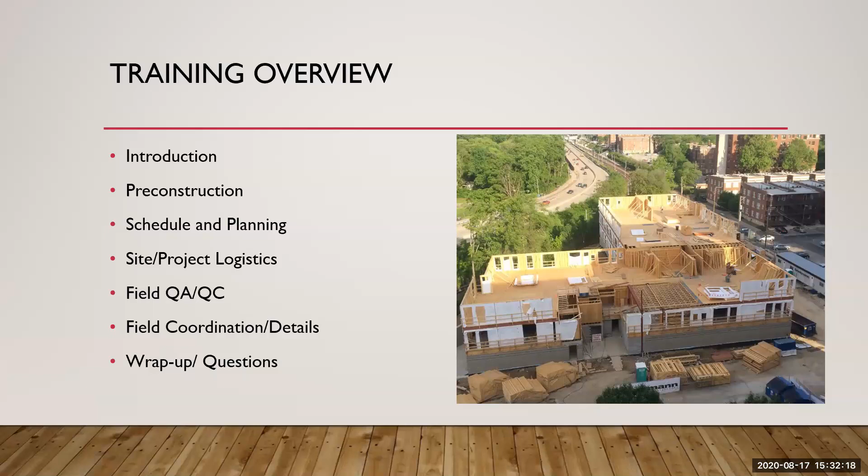So the goal of today's presentation is hopefully when we leave today, you guys have a little bit of a better understanding of what it's like to be on a stick-built or panelized wood project if you've never been on one. Hopefully if you have been, you're able to contribute a little bit, or you learn something a little bit different, a little bit new. The way we're going to structure our presentation, Leanne's going to focus more on the stick-built side, and I'm going to focus more on giving you information from a panelized perspective. So we'll kind of be ping-ponging back and forth between each other, trying to help tie it all together.

And then obviously, open format, you guys have been to the trainings before. Make sure if you've got any questions to ask them. If Leanne or I aren't able to answer the question, I'm sure there's somebody in the room that's going to be able to provide a little bit of insight. And then, we're here to answer your questions. So if you have anything that you want to know or bounce off, let us know, and we can do some more research after the training.

So let's jump into the pre-construction items here. So I sat down with Matt Funk for a little bit this morning and picked his brain a little bit about it. So as you guys know, and this probably goes for every single project you're ever on, a lot of decisions that get made during the pre-construction phase dictate how your field operations are going to go throughout the duration of the project. So when you're talking about wood projects, for example, the decision to go stick-built or panelized is going to completely take you down 2 separate paths that have 2 separate game plans, 2 separate schedules, 2 separate everything.

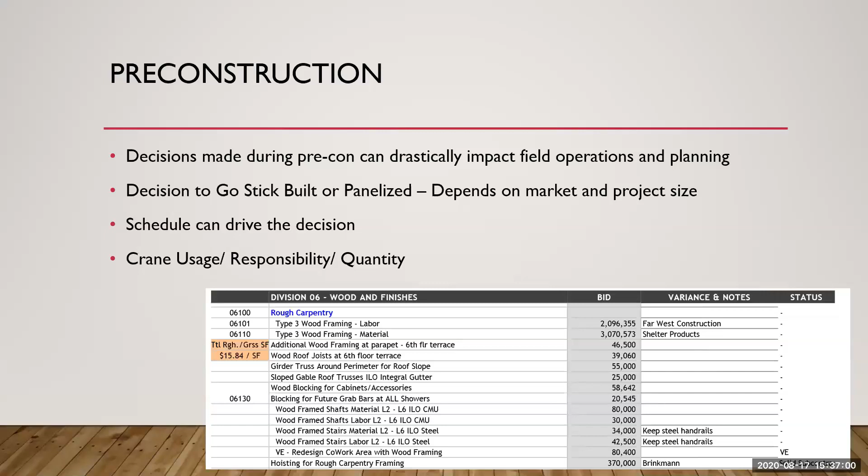Yeah, for sure. So just to go over this, we already touched on that last week, but the submittals basically will look pretty similar for stick-built and panelized projects, but the one thing they most differ on, which we just talked about, is the shop drawing phase of all the panelized shop drawings. When you go through all those panelized shop drawings, you really understand the drawings well, and you see where your MEPs will overlap into everything.

So one thing that I tried to do on our project specifically was on our layout drawings, trying to put where all our mechanical ducts were going to go through all the trusses and everything, which we'll look at a little bit later. But that was probably the biggest thing from the panelized shop drawings that's a little bit different from stick-built.

And then another big thing that we need to look at is always your weather barrier information, to make sure that you have a ZIP or Tyvek rep involved in the whole process. So you want to make sure that they come out and do a few site visits. They're meeting with everyone on site, your superintendent, your engineer. Specifically, they need to meet with your framer, make sure they understand the requirements.

And it's not that they're going to be going through the architect, but they need to make sure that they apply to the requirements through the ZIP system or Tyvek. And then other things to just check for when you're in the pre-construction phase before anything has really been put into place: it sounds silly, but make sure that all your door swings don't conflict with any FF&E or casework.

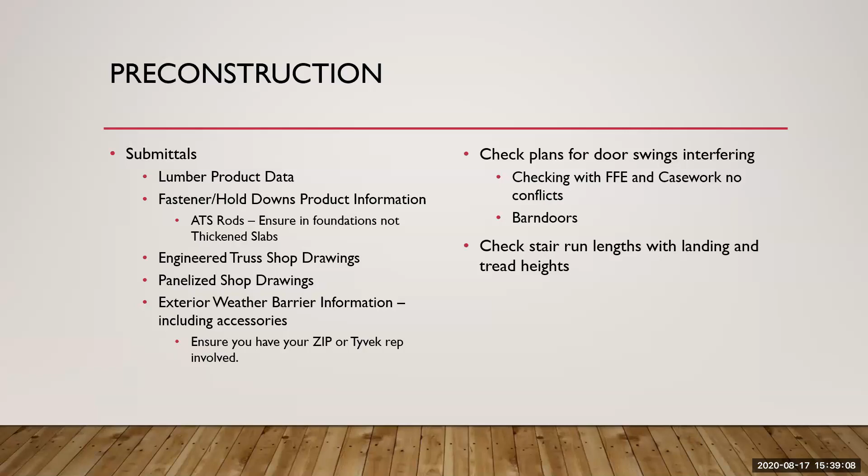Hey, Garrett, before we dive into the scheduling stuff, from us doing panelization, in my mind, if your drawings are incomplete or just not great, with panelization you're pretty much hiring an expert detailer to check the structural engineer, and you can flush out a lot of the RFIs and potential conflicts before it snowballs into a field delay or an issue in the field.

On our project, for instance, we're light years ahead of where we would have been if we were trying to stick frame this and the RFIs were coming up as the header didn't work as we came across it. So that's something to take into account: if you have concerns with how complete your drawings are, a panelizer would be a good option, because that's somebody that will really flush out all the drawings and make sure it works.

And to that point, when you're panelizing, our panelizer designer is a subcontractor just like any other sub. You can find good ones and you can have bad ones. We had a really thorough good one. So keep that in mind, because if you have a less than great designer who's just taking what's in the drawings and making panel shops out of it rather than thinking it through and coordinating with everything, that could cause you more headaches down the road. So that's a really good point, because not only do you have another subcontractor, but they could also be good and bad.

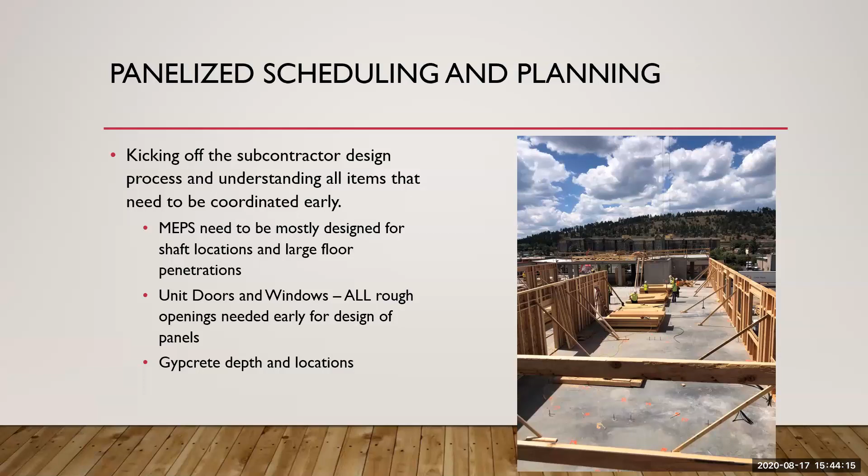So keeping the ball rolling on the scheduling and planning side of things, this is a little bit of a case study. I've got a lot of examples from Uncommon down in Flagstaff, to give you guys an idea about how fast panelization can go. And it sounds like stick built can keep up in some instances, but this is a picture of this project on May 24th of this year. We had just stood the first panels on our 3rd floor of our first phase.

Roughly 3 weeks later, about 3 weeks to the day, 15 working days, we were setting our first wall panels on the 4th floor above. So we were able to knock out exterior wall panels, interior wall panels, the floor trusses for the floor above, floor sheathing, all the associated inspections with that, and then get the panels started in about 15 working days. They were working weekends, but if you look at a work time frame, they're cranking out a floor of about 20,000 square feet in about 15 working days.

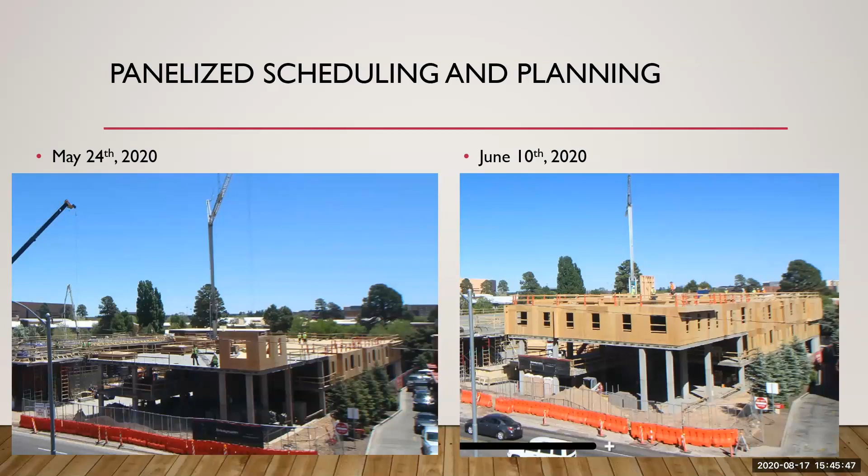Sure. Well, to zero in on it even further than looking at the big numbers, understanding those rates is key. You've got to know that so you can schedule. Bobby, Steve, Leanne, and I sat down before this and talked through some numbers. In our contract at Purdue we had 8,000 as our baseline for our carpenter. But Bobby was saying, hey, we're getting more than that stick built, honestly better than 8,000 square feet.

So big picture, thumb in the air kind of thing, if you're doing some pre-con work or trying to estimate this stuff, planning on somewhere between 8,000 and 12,000 square feet per week spits out a pretty accurate number of what you should be targeting as far as production is concerned. But that square footage includes the walls, floor joists, and the sheathing for the floor above. So that's a whole floor.

And then manpower from that, you're looking at crew sizes of anywhere between 8 to 10 guys either stick building walls or lifting your panels, and then another 8 to 10 guys following your wall crews with the crane, setting your floor joists for the floor above, and then nailing down your sheathing.

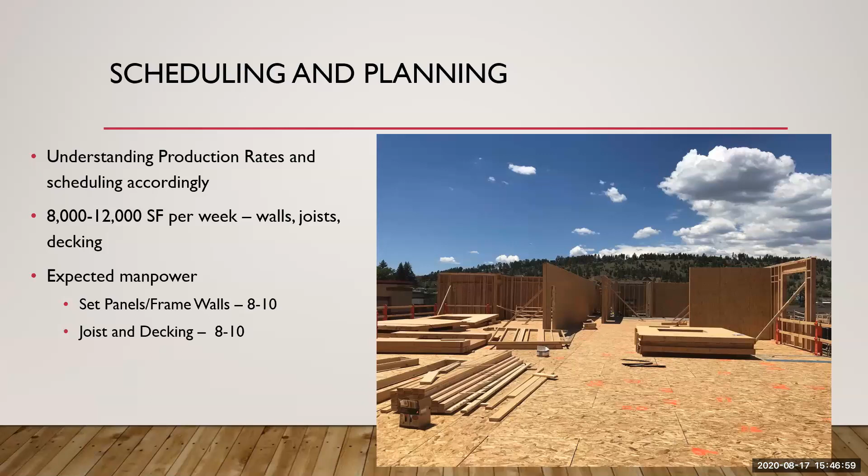So scheduling and pre-planning. When you're looking at sequencing and constructability, make sure you're doing multiple cover inspections per floor so that you can speed up the process. We split ours into the north and south Element portion, then north and south of the commons, and then north and south of the Aloft, so that on each floor we could go on to the next phase.

And when you're creating your phasing plan, don't get stuck just in the framing aspect, but look beyond that. Okay, what has the most finishes? What's going to take the longest? So we started on our Element side because they have the extended stay units, so those units were going to take longer. We needed to start on the Element, work our way through the commons and out into the Aloft side.

And then pre-rocking, making sure you're getting all your pre-rocking in before. Some of the common places are your ceilings and corridors, top of your interior partitions, mechanical electrical rooms, your baths and showers. And one that's important is the stairwells, making sure that you buy it out with your framer so that whenever they're framing those landings, they put their pre-rock in there so that you're not slowed down.

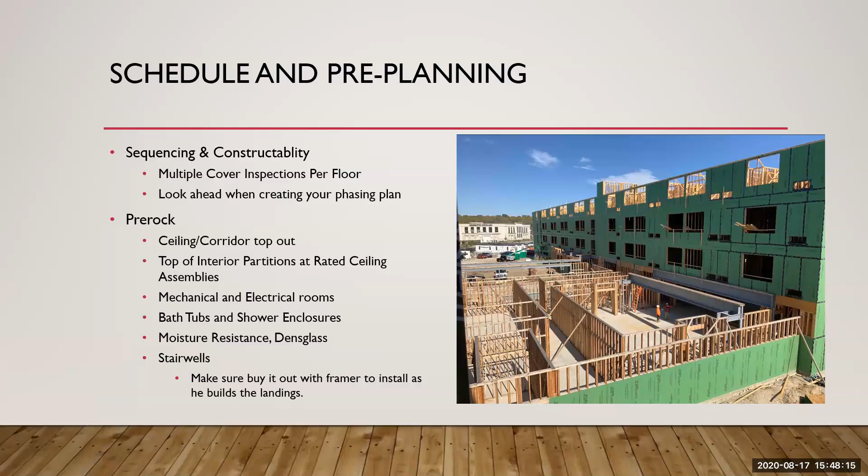So this topic right here, we wanted to almost have a little bit of a group discussion on. I think the settling of wood is always different; you get mixed answers from everyone. At Uncommon, we had a unique situation where our vinyl window installer didn't want to begin installing windows until after the roof sheathing and basically all the structure had been completed. We wanted to get them started as soon as wall openings were available. So what have you guys come across?

Because for us, we were pushing that, but we're still trying to figure out the risks of installing our vinyl windows ahead of the roof being in place. Has anybody else in the room come across a situation with the sequencing of your windows or other items like drywall, with the fear of drywall cracks and things like that? Any stories to tell?

We had a situation in Denver, a two-story all wood structure with wood roof trusses, and the consensus was you don't want to put in any windows or drywall until you have your roof trusses on. Really? So did you hold off? No windows and no drywall until you had the roof? We put in what we could. We tried to rip some drywall because that was a gypcrete project too, and that's kind of the precursor for the gypcrete.

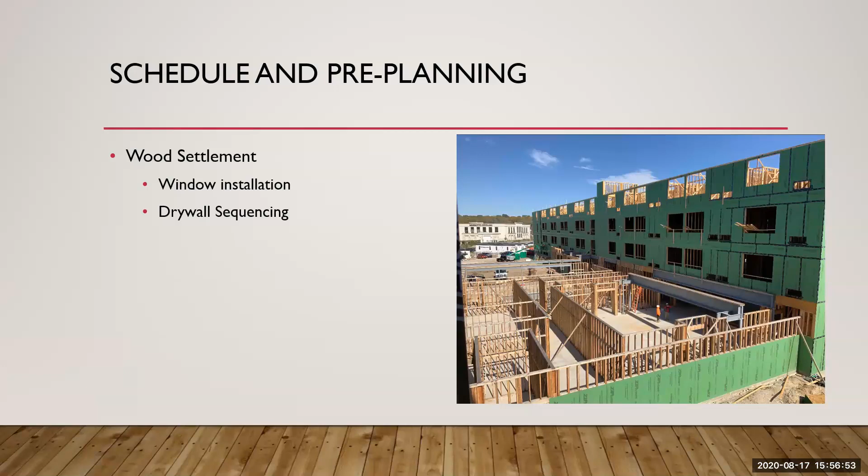So having those details worked out, have those specific pointed conversations in your pre-con meetings with your subcontractors, with your drywall guy, with your window guy, with your framing guy. Make sure you have those things and then put them together and figure out how you want to do it as a team. Like Kendrick said, get your directors involved in that conversation. If there's a little bit of risk involved, they'll have to have some meetings and make a decision. So appreciate the input.

All right, so out of scheduling, once you move out of it, one thing you really need as you're working on your scheduling is having a phasing plan. A phasing plan should not be a foreign type of thing to anyone in this room. Most projects, you've got some sort of phasing plan, and all you're really doing is breaking a project into different areas where you're focusing different work or pushing work ahead sooner than others and breaking it up.

So this is the footprint of the Uncommon project, and schedule drove us to do a phasing plan. And why we did the phasing in this manner is we're building the project in towers. So we're building this project up to the roof level, getting a roof on it so that we can start our drywall in this phase rather than building all of level 2.

Oh, do that every time.

Building all of level 2 and having to wait to build all the way up before you can start any drywall. This allows you to start other trades quicker, and this allows you to really get things going. So hopefully by the time you're into the job, you've got places that are sitting empty, punch listed, ready to go, and you're not having to worry about finishing the whole job at one time.

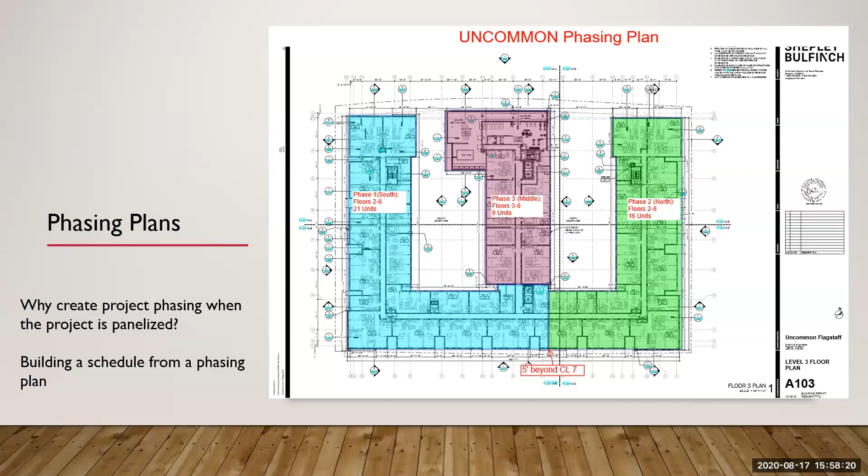But it's obviously critical to have this phasing plan at the start of the project so that you can schedule it, because having a phasing plan changes your schedule completely. So knowing what you want to schedule and knowing square footages and things is pretty important to have. So you've got to have full subcontractor buy-in into that.

So having this early, you've got to make sure that when you're having those buyout meetings, your subcontractors are aware that they need to be breaking up their crews for this, prepping to have potentially 2 crews working at one time in different phases. So everybody's got to know. And this kind of ties into what Kendrick was saying, you've got to manage your design team, the shop drawing review, and the procurement process.

So if you're going to phase a job, you have got to make sure that not only do your subcontractors plan to break up their shop drawing processes so that you've got them in phases, but you've got to have your architect and structural engineer all prepped and ready to be reviewing them in broken up phases like that.

And then once you get those approvals, you've got to make sure that your subcontractors then follow through with that and they procure those materials in that order with their suppliers. So if you have one of those chains break in that line, you could derail a whole project if phase 3 starts getting made before phase 1 or something like that, and lead times can get all jumbled up. So having those ducks in a row early on is very important, having everybody bought into that.

And obviously, you've got a guy drawing up your panels early on. Answering RFIs and getting the design team involved in questions is so much more important at that phase because the answers are time sensitive, even more so than on a typical job where you can stand to wait. But if you've got a whole phase of panels waiting on design coordination, not answering an RFI promptly from your design team or from internally could really cause major problems with getting your panels in the order that you need them.

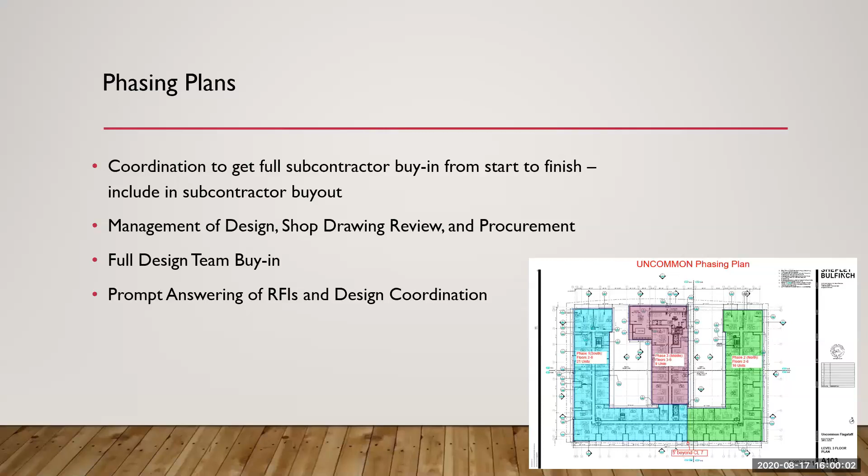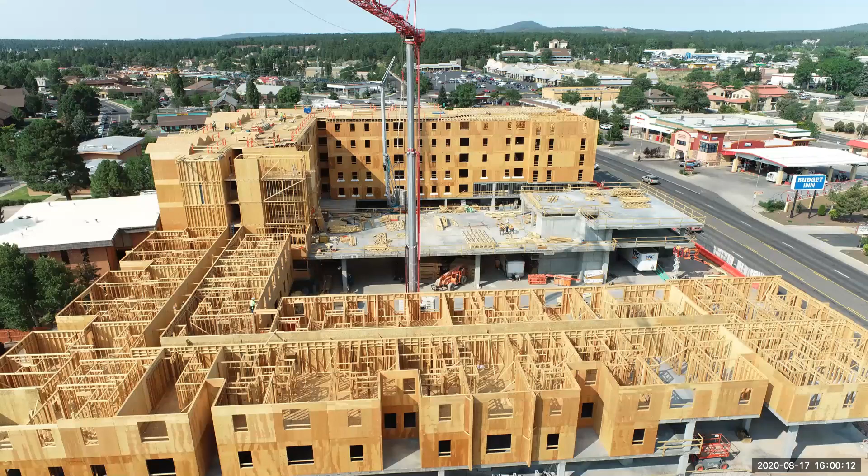So I wanted to show a picture. This is from a few weeks ago, at Uncommon, and I wanted to show you, putting a phasing plan together and having it midway through execution, this is what it looks like. So this was at phase one. We've got our 5 stories of wood built up with our roof sheathing on and with our roof eaves. We've got roofing going on as we speak right now. But this shows you that first phase.

Our second phase is down here. This is the 3rd and 4th floors right there. So you can kind of see that phasing at work. We're pretty much topped out with our wood framing in our phase 1. We're midway through our phase 2, and we haven't even started our wood paneling on our phase 3 yet. So look at it, put your hard hat on and think about it.

We've got MEPs roughed in through level 5 over here. We've got our pre-rock in. We're prepping. We've got our gypcrete under our shower bases and our dead spaces already in place. We're teeing up and getting ready to do our drywall in that phase of the building. We're still just getting ready for the MEPs to start over here. So we've got that staggered flow going. On big projects like this with tight schedules, that's the type of thing you've got to have working for you to make sure you can fit all those things in and get it done by the time your due date comes.

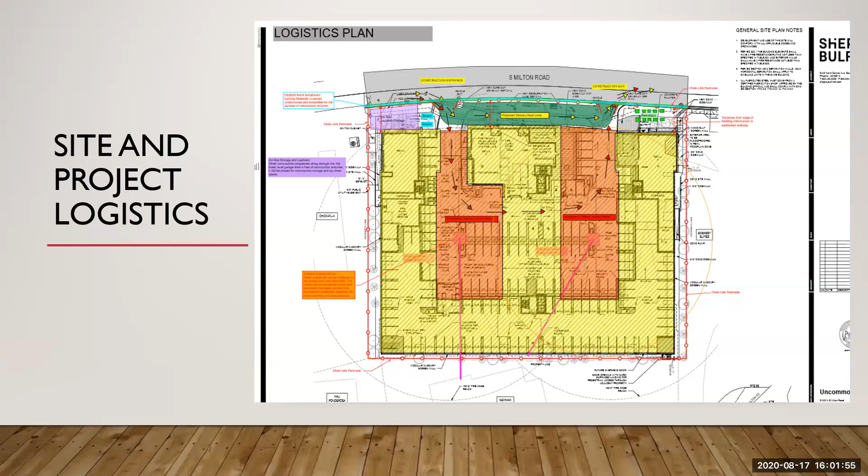So for your site and project logistics, you need a large laydown area for all your lumber and trusses to be on site. It needs to be out of the mud. For our project specifically, we didn't need one off site. It's kind of cool whenever you contrast the 2 different projects because we had a huge site, whereas they did not. So they actually had to have a separate place for their laydown area. We just needed to put down some rock and we could get everything there. It was a very nice luxury to have.

And then just reviewing the lifting plan and where the crane's going to be, and make sure that area stays clear. So make sure you don't have any guys put their job trailers there or something ridiculous like that. And then something that we specifically had to have was a construction road for emergency access, to be able to go around our entire project before we could start going vertical.

And then as well, depending on your jurisdiction, I'm not sure if that's a requirement for everyone, but all of our fire hydrants had to be live before we went vertical as well, since it was a wood framed building. Yeah, that fire thing applied to us too. If you're in wood construction, you're building with combustible materials. So that puts you in a different category than if you're doing metal framing and concrete. So like Leanne mentioned, having a live fire hydrant was a requirement of her job.

For us down in Arizona, we needed to have a live fire hydrant. We also needed to be taking up a standpipe that could be made live by the fire department if they needed to take a hose to areas. So whatever floor we had framing going on, we had to have a riser up to that floor.

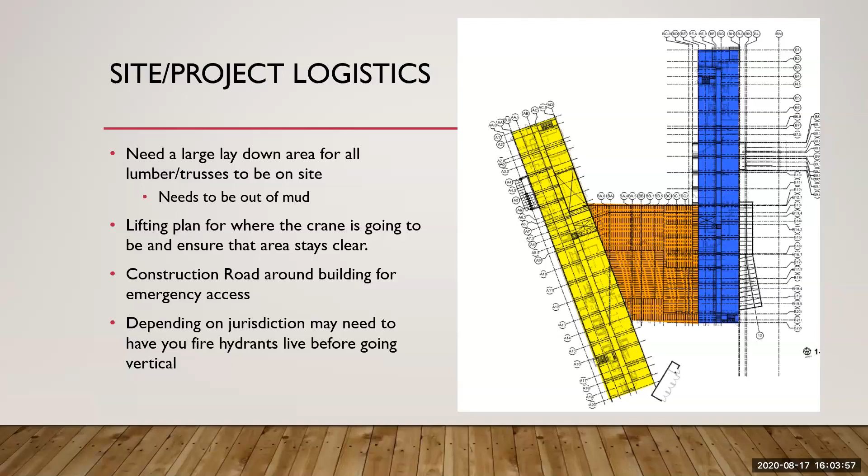At Uncommon, we've got two different cranes. Our footprint is much larger than, say, what Purdue was. So the big difference was, in order to be able to service both areas, you can see the swing radius of those. This crane can service three quarters of the site, and that crane can service three quarters of the site. So knowing the logistics, the size of the cranes, and your budget is really going to drive how you end up laying those tower cranes out.

So your project has tower cranes on it. You get them bought, you bring them, or you get the subcontract bought out. What's involved with that? Is your site team getting ready to set up and plan for that? What do you got to think about?

As simple or as silly as it may sound, it's really important to make sure you coordinate the elevations of those things. You don't want to cross streams, you know what I'm saying? So you don't ever want to have a situation where your tower cranes will conflict with each other. Obviously, this tower crane could drop a cable and conflict with that one, but with the heights at which we coordinated it at Uncommon, they don't have the risk of swinging into each other or hitting each other from a mast or boom standpoint.

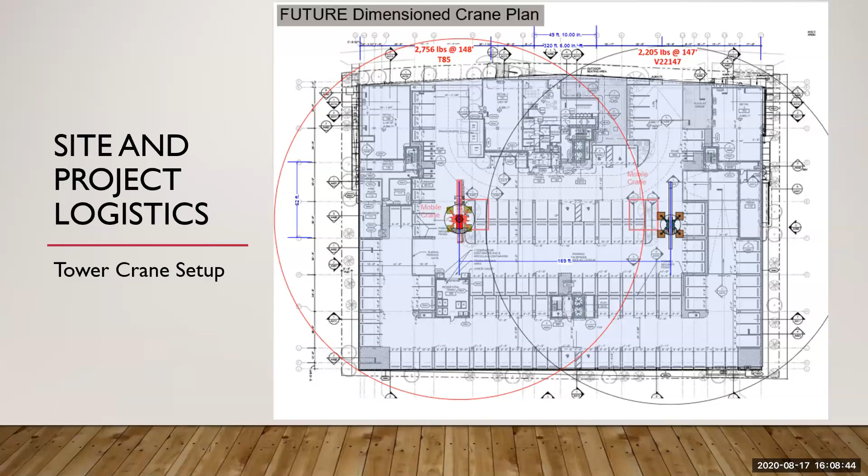Okay. Talked about the tower crane. Let's touch on one of the most important things when you talk about site logistics or field operations, safety. We've got some examples here. So any stick build project that you've got some height to, you've always got leading edges and things like that. And making sure you take these things into account when you're building panels is really important. Leading edge protection. This is the system that our carpenters are using at Uncommon to basically give us some protection when you're up there inspecting and putting that sheeting on.

You can see they put these in just far enough so that when the wall panels for the next phase come on, they have just enough room to set those exterior wall panels outside that barrier, and they can knock all those in place and then brace them, and then they can pull these barriers. So there's basically an unbroken edge protection as they build these upper floors, which is a pretty slick deal.

Another really important thing with safety is controlled access zones. Obviously, if we're using a tower crane like this to swing panels and set, this is our 3rd floor. They're taking panels up to the 4th floor to stand them up. You can't have anybody working in that floor beneath. If a load comes loose or something like that, you don't want to have people working in that area where those panels will punch right through the sheathing or the decking and potentially hurt or kill someone.

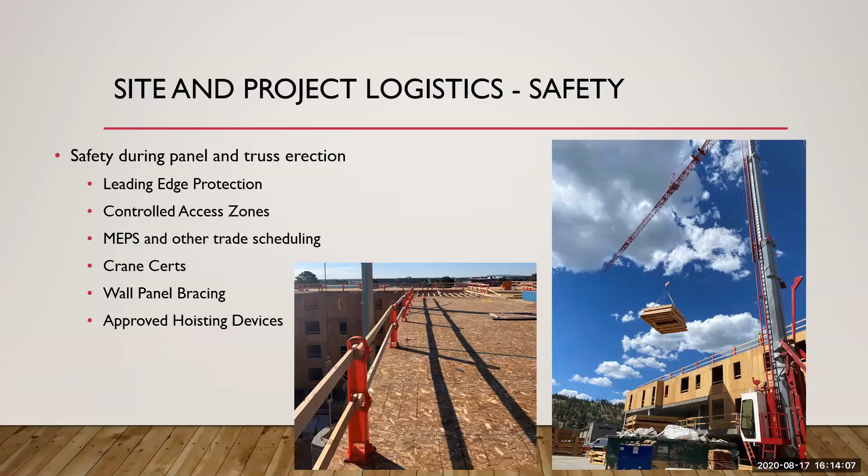Sorry, I feel like I'm talking endlessly. Shocker.

If you've got those tower cranes on site, some things you need to be thinking about: how are you going to power those things? Tower cranes require power. They don't have their own internal engines. So you either have to have temporary power from the utility set up, your permanent building power set up and ready to accept those, or have it powered by some sort of generator. So think about those things, because it might slip your mind, but that could end up being a very, very large cost to your job if it gets overlooked. How am I going to power this thing?

Also with the tower crane, you may have all kinds of space or not a lot, but if the area you plan on staging all your panels or your bunks of wood, anything like that, is outside the sweep of that crane, it could be a problem. And then I've already gone through the air rights and airspace permissions. Agreed.

Okay. So the next important thing with site logistics and planning is if you've got a tight job site, think about having a laydown yard, a place separate from your actual job site where you can bring all your big deliveries. You don't have to worry about traffic control or traffic restrictions. In some places, there's more than enough room. Leanne and the project in Kansas City had the luxury of acres and acres of free open space. At Flagstaff, we didn't have 500 square feet to spare.

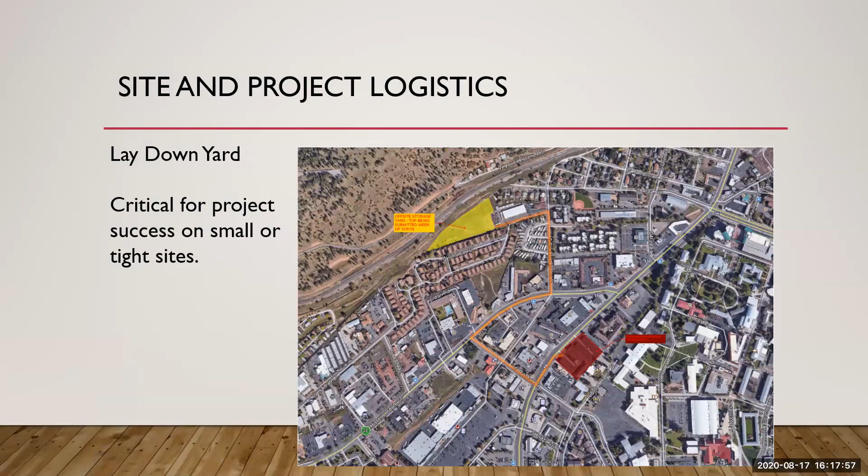I guess part of that to acknowledge is they're two separate contracts, the furnish and the install. Most instances I've been involved with, it's all a lump sum package. So the framer has the panels also, so we haven't had to worry about taking that extra step to make sure that material was available. Kind of the same with the crane as well. I don't know if we're renting this one or not, but there comes more risk with not renting and more coordination with insurance. You'll probably tell us about the operators and how much that costs too. Yeah. It's probably more imperative if you have those two contracts.

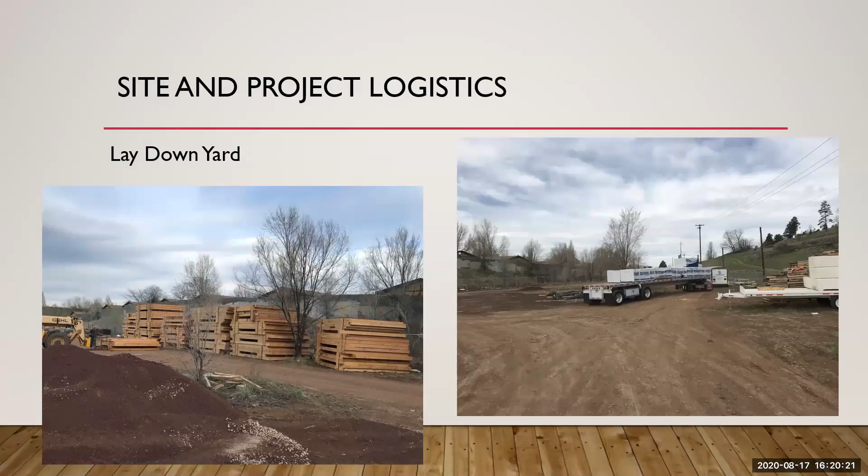So just to kind of piggyback on those things, not only is it good for just the logistics side of things, but that laydown area allows us to have a place to receive those shipments. And our subcontractor actually has guys at that laydown yard unloading, and they're shaking them out, figuring out where everything goes and taking quick measurements and making sure the panels are right.

We found issues in the laydown yard before the panels have gone up that has allowed us to try and get ahead of problems that, if those panels would show up at the job site and you would have gone to put it in place, you would have been like, oh crap. We've been able to get ahead of some field QC items by having them checking these panels when they get them rather than bringing them to the site.

But it helps keep the job from being cluttered. Even if you have a tight job or even a job site with some space, having that laydown yard away from the job site helps keep that operation separate, and all your other trades are able to move around much more freely than if you had hundreds of wall panels stacked up on your site. Did you fill up more storage material too?

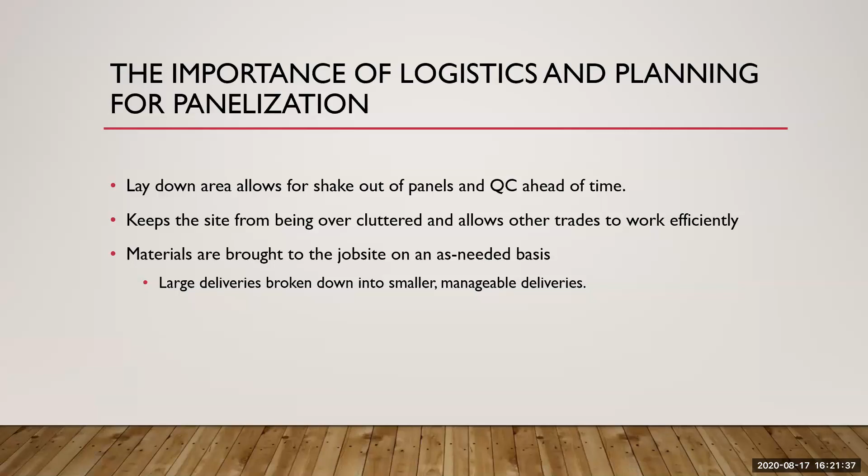And we kind of already hit on it, but the materials are brought to the job site on an as-needed basis in much smaller, more manageable deliveries rather than having a giant semi come with who knows what on it. So.

All right. Oh, yeah. So we threw this in there right before the meeting. We thought it'd be a good thing to touch on, but field operations kind of goes hand in hand with having your pre-con meeting, having that sit-down meeting with your framing contractor, making sure weeks, if not a month or so in advance, you've got all the details talked through, ironed out, and agreed upon.

So having your job-specific agenda, like pulling down that Bridgman template and going through it yourself one time and making sure that you've got questions and things that are going to be applied to your job and be useful. It's really important to do that. Very, very important. You'll get some questions out of it.

So isn't that one you guys flipped into Procore as a standard template based on this one? I know you guys came up with some pretty good templates on that job in general, but framing is one of them at the time. Our QC was one that we had a really sweet template in Procore. We don't have that sub pre-con agenda in there per se.

Yeah, but the idea is you come up with whatever it is, 12 things for one project, right? Talking points, initiatives, QC initiatives, whatever you want to call it. Yeah. And that rolls into some type of template, so you have all that figured out on the side, on some of these larger complicated projects. So. Yeah, I've got a PDF on our last sheet with a Procore slide. I think I know what you're talking about. I've got a little example of that.

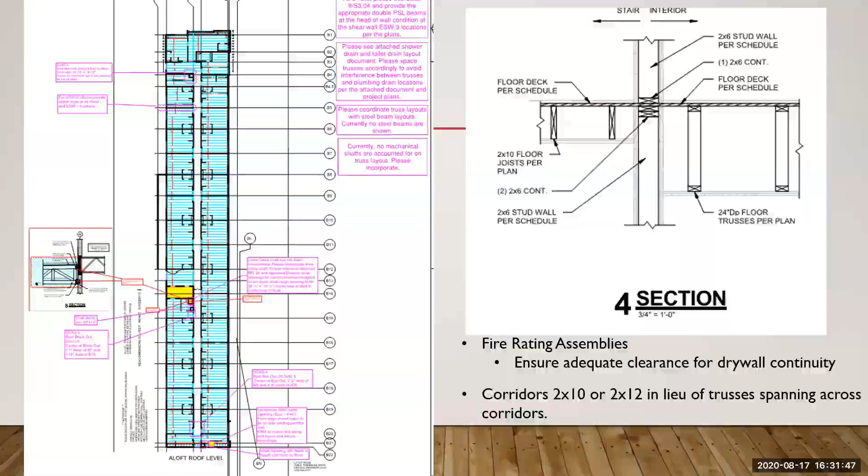We're not going to dive all the way into it, because I know she went over everything with the plumbing and making sure that we didn't have any conflicts. We did our overlays as well, but this was an additional document we provided to our truss manufacturers, going through each room layout and making a no truss zone, which ended up being really successful. We didn't have any plumbing penetrations hitting any trusses. So that was very good for us if anyone is looking for a way to avoid that.

This wasn't something I thought of until just now, but we had this problem at Uncommon. Our first few floors of floor trusses, the trusses were landing right where toilets were, right where showers were. We'd sent all of the MEP CAD files to our truss designer early on, and they'd asked for them specifically so they could coordinate the trusses around MEPs. So we took our foot off the gas on that one, thinking that they had it under control.

Well, it came down to time, and we had a lot of trusses because all the trusses are in place 2 floors before the MEPs start. Once they realized we were having these problems, the plumbers had to run up through the rest of the building and catch this and adjust it.

So we had to make a quick adjustment, like when we were 3 or 4 floors into the project, to get those truss guys aware of where our plumbing stuff was and to get those trusses out of the zone. So the planning that Leanne put in on Aloft was something that we had assumed that our subcontractors had, that didn't end up happening. So this is pretty useful information to kind of plan those plumbing locations out early on.

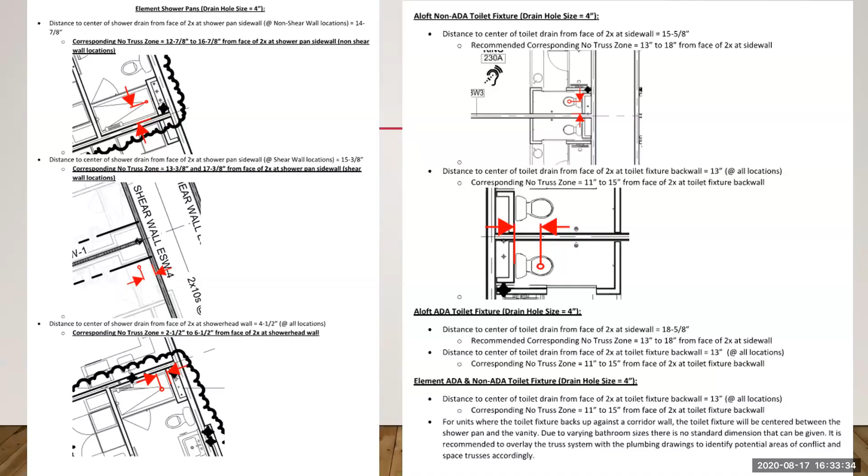And then this is another, just kind of reiterating the fact that knowing where all of your mechanical is, if it's going to be up in the duct space or if it's going to be below the lid, that's really important whenever you're looking at all your joists and everything, and making sure you're marking up. Get with your mechanical contractor. Okay, so the duct's this big, how much more space do you need? Is it going to be lined, or is the insulation going to be around it? Knowing exactly how much space each one needs is really important.

And then another thing that we kind of ran into as well is our roof hatches, making sure that you're coordinating. If you have the alternating tread ladders, the shaft sizes sometimes impede on that, and you won't have clearance for the firemen to get into the ladder and go up because of the rails and everything. So that was something that we ended up changing early on in the process so that we didn't have any issues later on. But yeah, just coordinating at the beginning and seeing how everything comes together is probably the most beneficial.

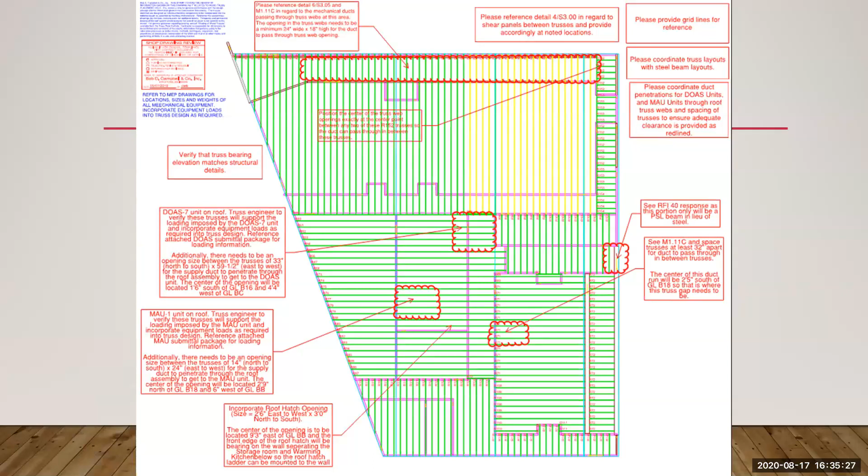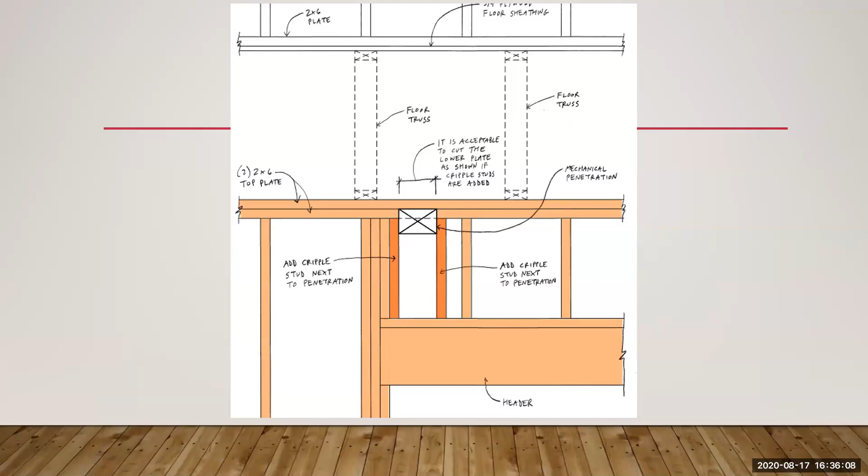So each one of these is different, and you've got to go through, and that's one big part of the QC process, going through and checking those things, because you miss a rod diameter. If your subcontractor goes and puts out a 7/8 inch rod instead of a 1-inch rod, your capacity in that rod just dropped from 13 to 17 down to 9 to 13. So you completely screwed up a structural design that you'd have to get a structural engineer involved in.

So those finer details are some of the things that are important to make sure you're checking out there in the field, because you miss it that first time and it's going to cause you some major headaches down the road where you're going to get the design team involved and potentially the owner. So keeping those things in mind when you're working with those TDSs and anchor bolts and things like that, it's pretty key.

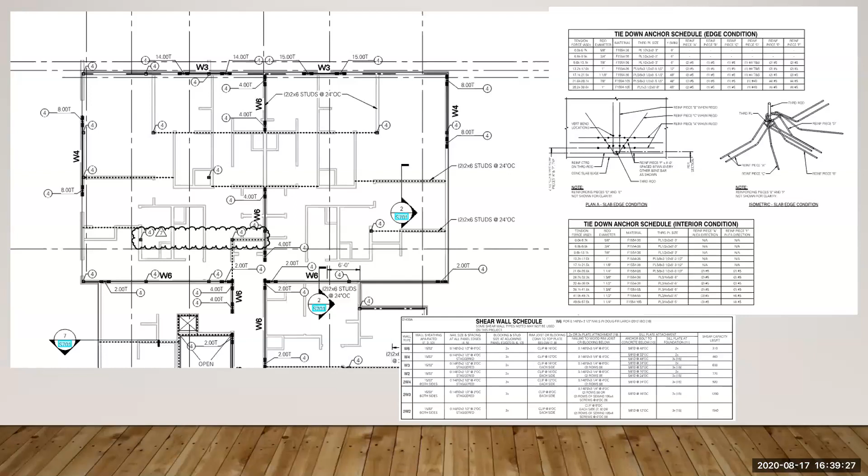So this next slide, I've got some pictures from when Lori and Jason were doing a QC before our PT deck pour. There's no wood on this besides the edge forms, but it's really important that the QC for wood framing and panelizing or stick building happens far before you ever have a piece of actual timber on site that's going to be a wall panel or whatnot.

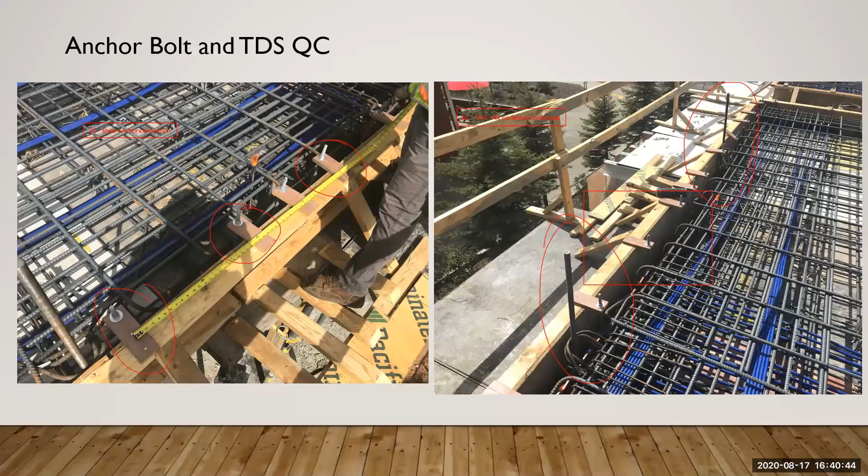So field coordination for stick build is a little bit different than panelized because you have to do a lot of it on site, and you really just have to go put a tape measure on everything. Literally every rough opening, you have to go put a tape on. My biggest thing is just communicating with the foreman every day and having hard copies for everyone. Just continuously hand people hard copies and go over any RFIs.

Luckily we had a pretty competent foreman, but depending on who you're dealing with, if you have a good guy on site, you can go through that process with him and just make sure he is up to date.

That's really important as far as being on site. And then, like I said earlier, just making sure you're physically going and checking out all your rough openings with your rough opening log and blocking logs. You have to put a tape on everything, because you think, oh, on a panelized, maybe you check the first third, maybe you check every single one, but if you have a panel that's all the same, you assume they all come out the same. But whenever it's stick framed, a different guy could frame that opening, and you just have to check everything.

Yeah, depends on if the carpenter went to the bar. Then. Yeah.

And then some of the items to QC that we have lined out are the door openings, and then off of that, making sure you take into account your gyp crete for those, and also your gyp crete will affect all of your electrical rough-ins and any of those heights. So making sure you're accounting for your gyp crete, windows and storefronts, your PTAC and VTAC openings.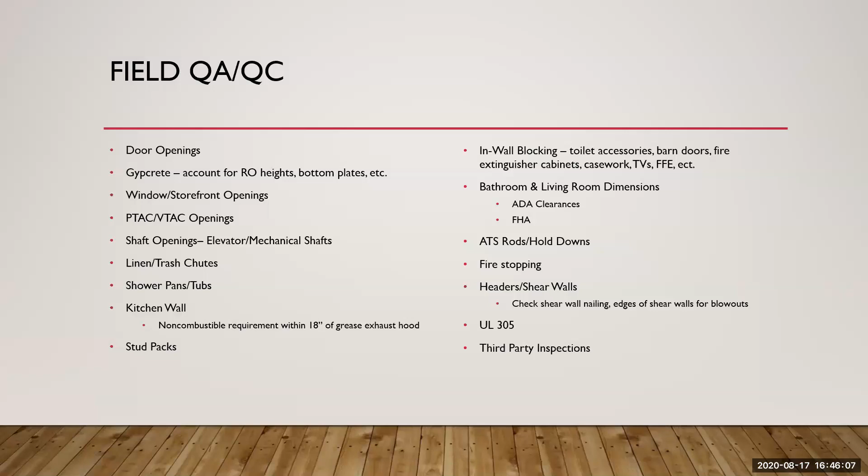So a blocking log. Leanne had mentioned this, and a lot of what was just on the previous slide falls into these next sheets. So Lori on Uncommon put these together, and I think, Zach, you've put together iterations of this before too on previous projects, right? But this is one of the sweetest things ever. Lori did a good job, and I think the fact that this has been thought of and came up with,

it's pretty good. But what this basically is, it's a consolidation of all of your wood blocking in-wall items, all consolidated in one place. Usually you're flipping through your plan sheets trying to check all the things that are in a wall; this is taking all the details and creating a PDF document, consolidating it into 3 sheets. So TV blocking's on here. You've got your unit blow-ups with dimensions on them.

You've got your blocking heights for your shower. You've got more like grab bar heights. Your ADA mounting heights for your ADA grab bars and things like that are all required per FHA. And here's a shot, we've got all kinds of different door types in the units, and we've got the rough opening sizes listed out for each one of these things. So all that information's right there, and I highly recommend that this gets put together. It's great for the project engineers, it's great for the superintendents to have this information.

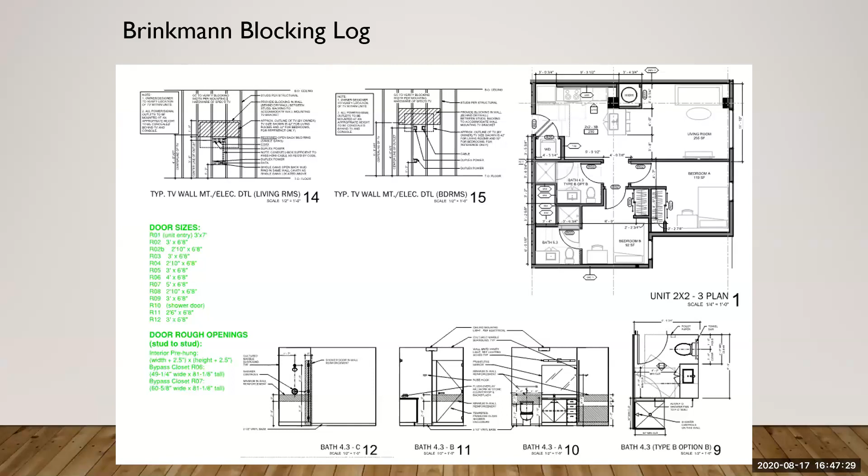Just kind of continuing on that. Next sheet has our FHA mounting heights for everything from an electrical panel all the way through thermostats and switches. Here's the electrical layouts, the outlet locations and the RCP where all the lights go, and then more bathroom. And these are just more layouts and blocking heights for the things that have to go in those units and in those bathrooms.

It's really great. You put this together, you spend a lot of time. I know Lori put a ton of time in this on the upfront end to consolidate it all, but the day or two that you spend building this saves hours and hours and hours in the field. You could probably attest to that too, Zach. You can give it to anybody and they can go do this. Yeah. So it helps tremendously with that aspect. Yep.

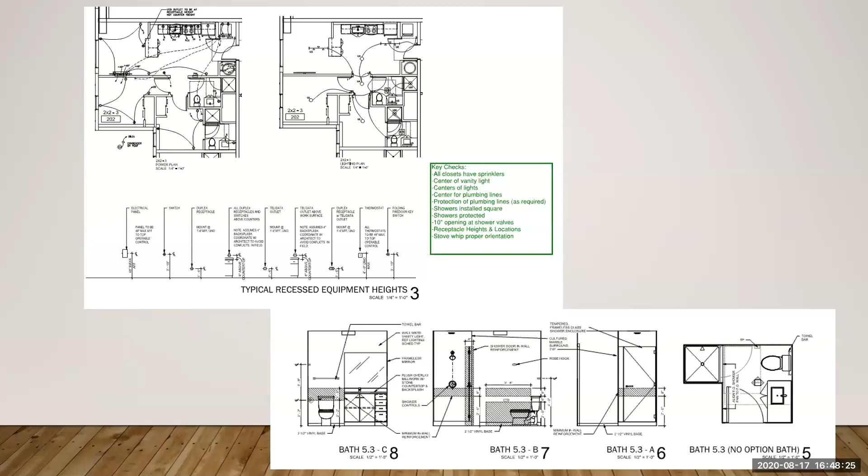So then, using that tool, here's the bit about the Procore. So what we have been doing at Uncommon is we created a template in Procore in our inspections tab where we got every single unit number. In Procore, it looks different than this; this is if you were to go and print the report. But you can go through and, for example, Unit 202 is the first unit that we have on this inspection report. So we've got a blocking tab: pass, fail, or NA.

I'm pretty sure that in Procore, if you click fail, it'll allow you to open up an observation. So you can then say, why didn't the blocking pass in this unit? You can create an item in Procore, take a picture while you're doing it, and it throws it up there, and you're able to start tracking why Unit 202 didn't pass, and you've got that list ready to go, and you can knock it all out at the same time rather than having to go back and type it into Excel or something like that.

We've got line items in every single unit for about 12 different things: blocking is one, receptacle heights, rough openings, shower base clearances, light fixtures centered. So it goes on, and we've got every single unit in our inspection reports in every single phase, and we can go through and check these things off, and we've got those inspection reports in Procore that we can refer back to. So that's a pretty slick way that we're applying Procore to basically do a punch list before drywall goes up.

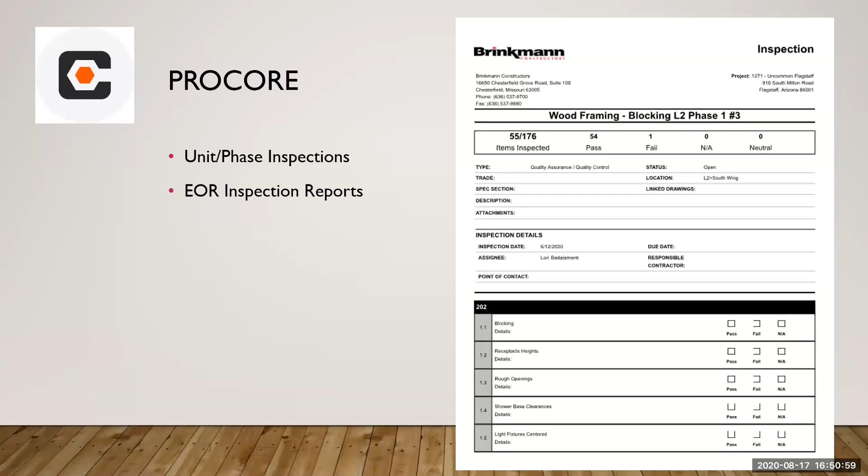You can't touch those. You can't modify them. You can't even cut little notches out of them. We had a problem where those TDSs, our shear walls were on the corridor. So we had TDS on every single unit opening because our shear wall spanned from unit door to unit door. So you got your entry door and you got TDSs on either side, wrapped by stud packs. Well, what's the first thing you do when you walk into a room? You reach to the side to flip on the light switch.

Also, if you flip open the wood framing section in the IBC 2012, 2015, whatever it is, it's very specific about how many notches you can take out of joists and studs and things like that, or size holes, 1/6, 1/3. It'd be good information for you guys to flip open and read that. It'll give you a very good idea what you can and can't do. Yeah.